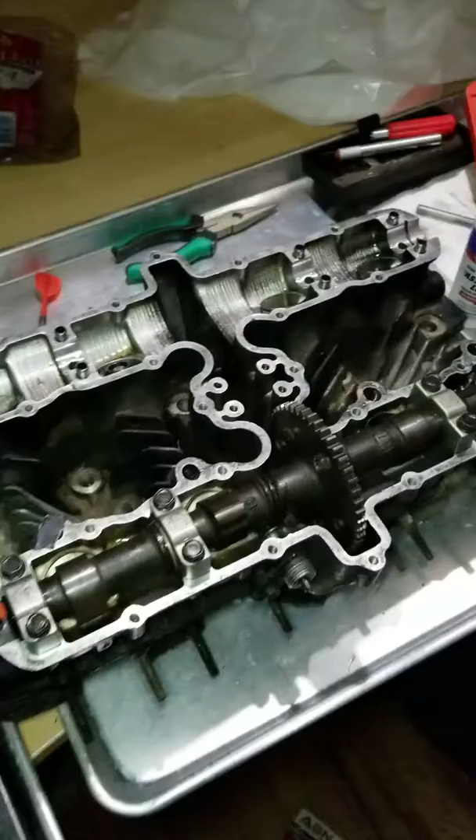Hi guys, I have been working on this head from my 1981 Kawasaki KZ750E2. It was not running really well at all, and then it stopped running altogether, and then it started backfiring every time I tried to start it up.

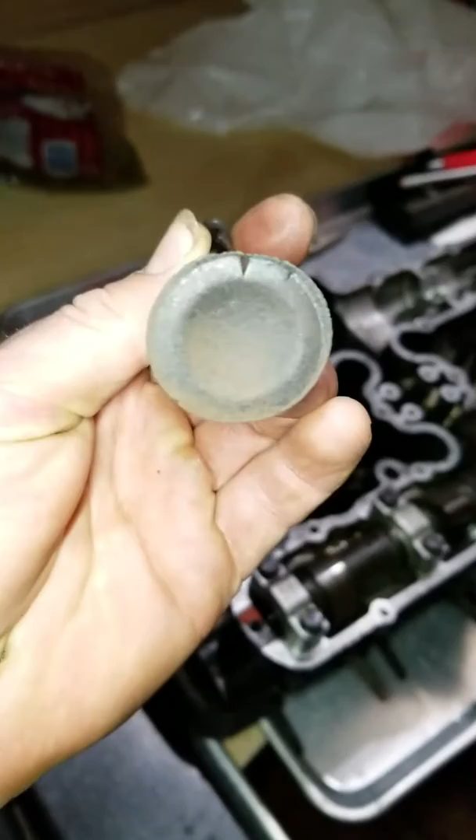So then eventually I got around to checking compression, and one of the pistons did not have any compression at all, and that's due to this valve, which you can see is really messed up, completely burnt out. That's what a burnt valve looks like.

You can also tell by the top, you can see there's a little lip there. Actually there's a big lip on this one. That's the center left valve, and this is the center right valve, which I'm also replacing. A little bit of a lip on it as well, so I decided to replace that.

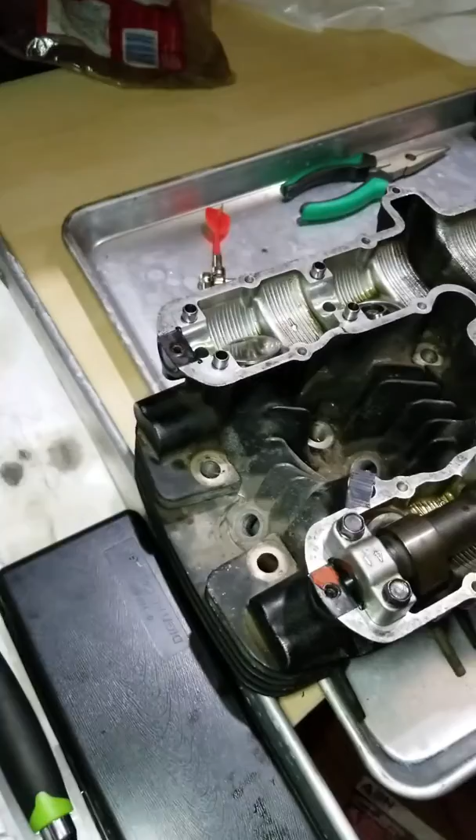Just wanted to show you guys what it looks like in here. So here we have the exhaust valve cam. You can tell that because it has the gear for the tachometer here, which actually leaks like a sieve, so I need to get a new valve or a new gasket for that as well.

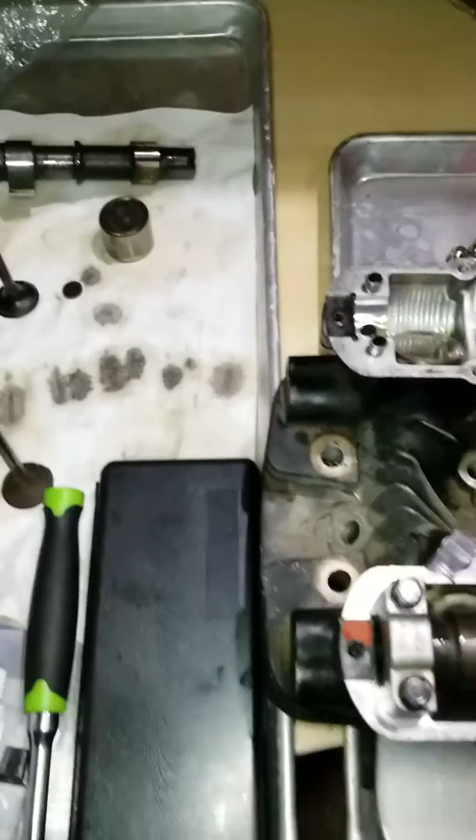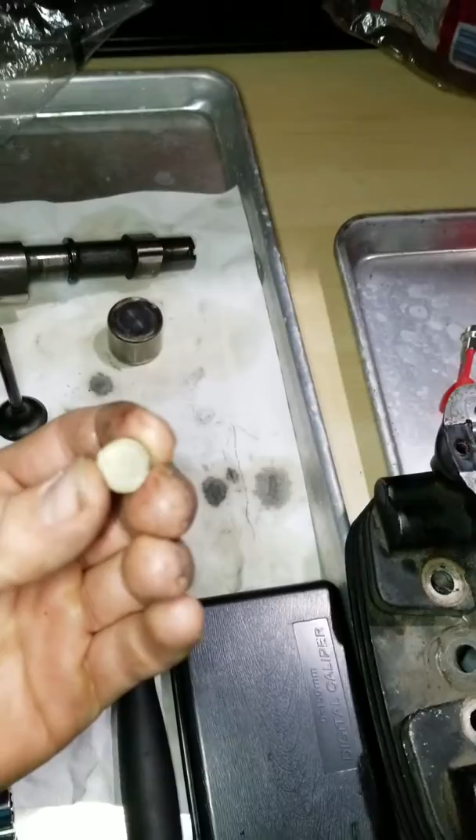Root problem for that burnt up valve is the shim spacing hadn't been done in far too long. Didn't even know it existed, but tore it apart anyways. Found these and realized that there's probably no gap, and so the valve was staying open, even though the lobes were all the way up, and so exhaust was leaking past and heating up the edges of those valves and started burning them up.

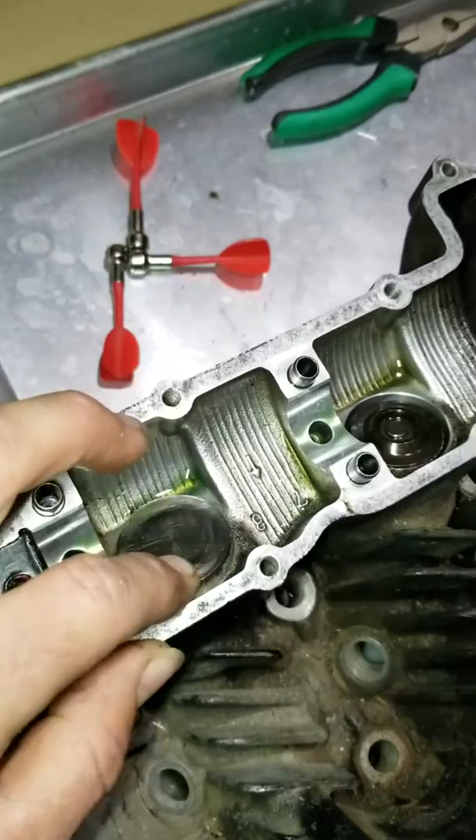It's kind of in a nice stage right here to show you guys what the internals look like. So there's the cam for the exhaust, and over here you can see the tappet buckets. These should move freely within there, and you should be able to get them in and out easily, but those two front ones were tight, so I'm going to replace those as well.

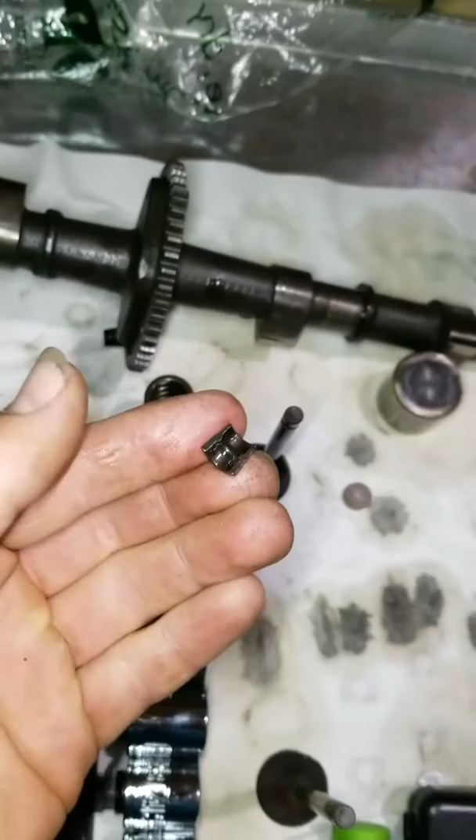And then you can see underneath there, this is the spring retainer, and inside the spring retainer you have these little conical holders that slip down in there and kind of wedge themselves in there.

You need a valve removal tool to get those out. I got the first one out with a socket and a hammer, which is not the right way to do it. To get them back together, you have to have that tool, or a very large C clamp would probably work, but it was worth the $22 off Amazon or whatever I spent on it.

So yeah, I'm putting in two new valves here. I put in new valve seals, you can kind of see that little blue thing in there. The old ones were just basically crumbling. Trying to get them out with a pair of pliers just tore them apart. I expected to replace them anyways, so I wasn't very delicate, but yeah.

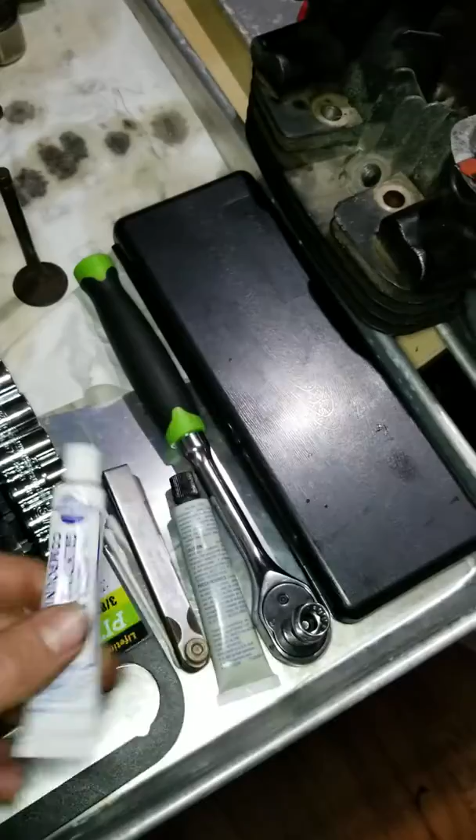So something else I did is I got some grinding metal compound. This stuff's great, you can just put it around the edge of the valve, put your valve in, hook up an electric drill, and it'll reseat your valves nicely, so you know you'll have good seal. While I was doing

the valve shim replacement, I used a feeler gauge underneath all of these, making sure there's a space, which none of these exhaust valves had any space at all underneath them, at least that I could feel with a 1,000th inch feeler gauge. Only two of the intake valves had any space underneath them.

So I assumed zero for the other two, because the tappet buckets were still moving, I could still rotate them. But for the front ones, I assumed that it was not zero because the tappet buckets weren't able to be moved with my finger, and also because I burned up that valve. So I actually moved the shims from the intake side, which were far smaller than the exhaust side, to the exhaust side, so I would have a significant gap to be able to be measured, and then did the math to see what clearance I needed, which can range from 0.08 millimeters to 0.18 millimeters valve gap.

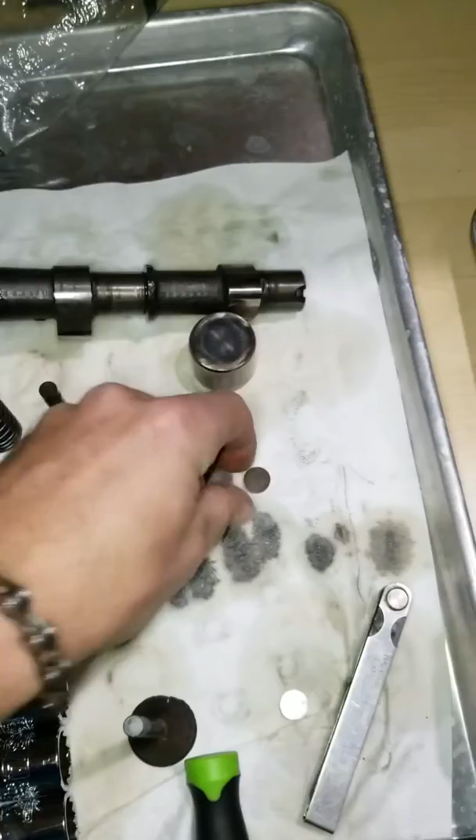These little valve shims actually fit underneath these tappet buckets. You kind of see a little spot for them, they stick to them, and they sit in here like that. So it's good to put them in like that, that way they're lined up when you're putting the tappet buckets in.

I actually had to put one of the tappet buckets in, and on that exhaust valve, that center left one that burned up, it was so messed up that I had to put it in the freezer to get it in. That's kind of the point I decided that needed to be replaced.

The other thing to note, you can see on the top of these, they're numbered 1, 2, 3, etc., and they have an arrow facing forward. This is actually the front of the bike, because this is the exhaust side. So that's really helpful, that way you know those go in the same place. And then here you also have 5, 6, 7, 8.

So that's nice. One thing also, you can use this gear here, which you can see this one has a big old chunk missing out of it. But you can use this to make sure that this cam is the right direction. You also notice this gear is bolted on from one side, so you can assume this is the proper installation because of this worm drive here. You can actually use that to make sure this one goes in right, so it'd be oriented to line up with that one.

So that's cool. I've got this lined up for the, if I turn the head around.

Another thing to note, the valve springs, this is the inner one. There's also the outer one. But on both of them, you'll notice that on the bottom you have tighter coils here than the top. So that's going to be the top where the looser coils are. That's something important to note while you're putting these back together.

And always lay out all your stuff, or else you'll get it really confused. It's hard to tell valves apart unless they're burnt up like mine are. But yeah, this is the 1981 Kawasaki KZ750.

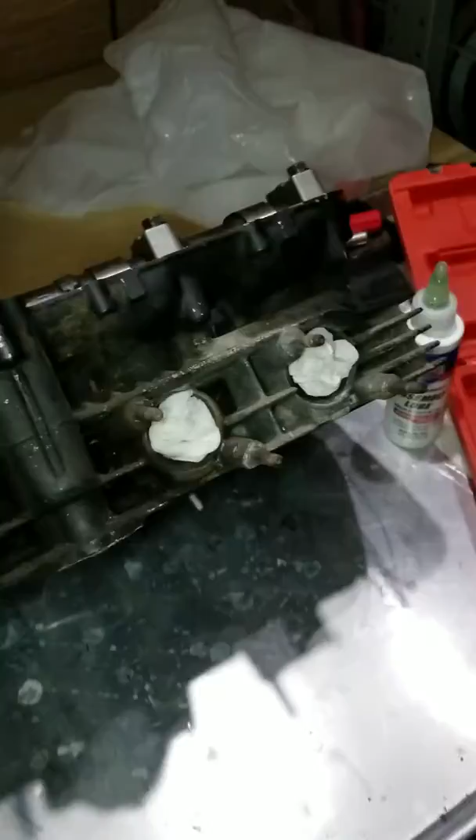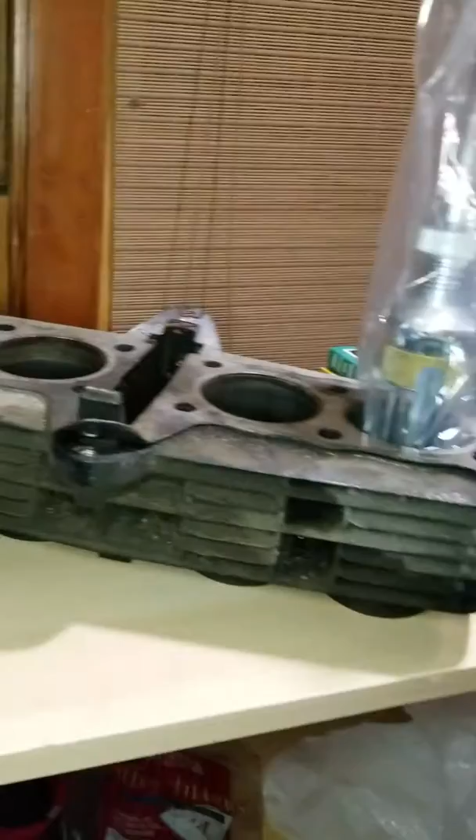Bike's been ridden pretty hard, had a lot of fun with it. But hopefully I'll get it back together. I'm also putting in a new head gasket, honing the cylinder.

This is the cylinder head. This is the chain tensioner here. But I actually got some gravel in the crankcase, so I'm gonna have to try and flush that out somehow. That's kind of the next step once I get all my parts in and installed.

Also getting the gasket that goes underneath here scraped off the crankcase. It's really stuck on there, so that's gonna be a little bit of a project. But other than that, I've got all my shim spacing proper.

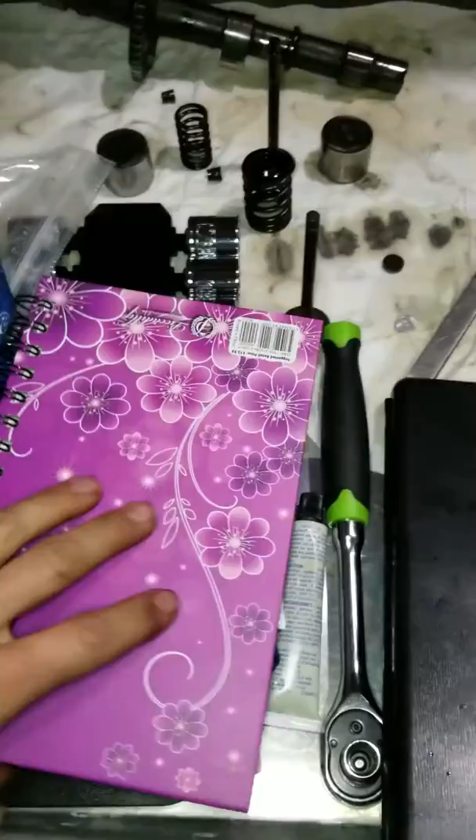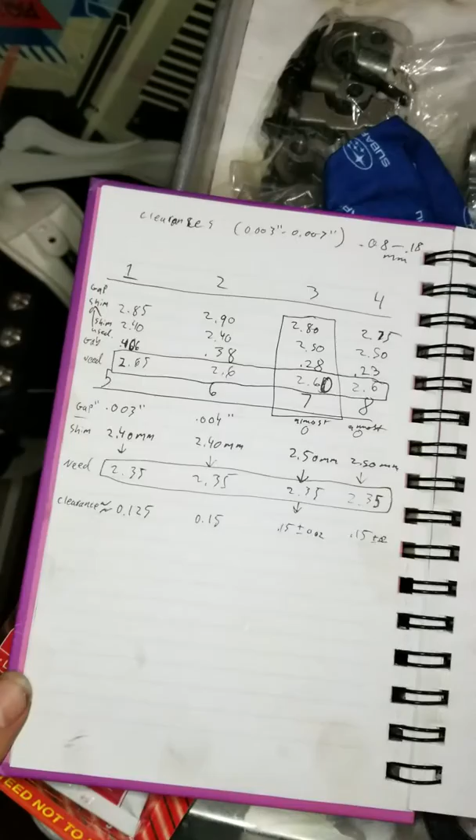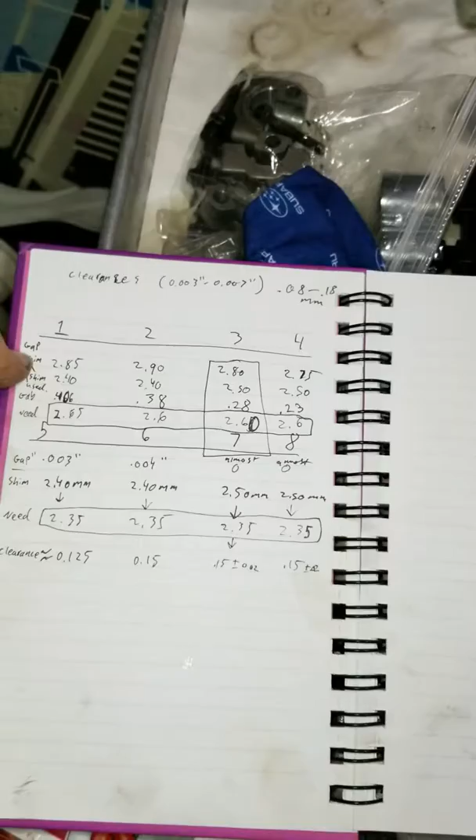I've actually got, excuse my notebook, but I've got the math I did to figure out what valve shims I needed. So you can pause it here if you want to take a look at it. I didn't really put the math in there, I did it on my phone, but you can kind of see how I laid it out. So here I'm measuring the original gap, which I didn't put here because I have it on the previous page, so that's kind of not that helpful.

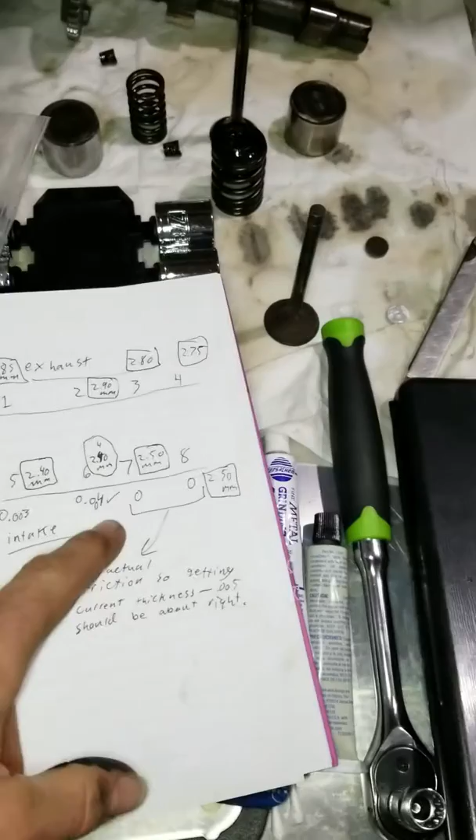It was 0.003, 0.004, and then 0 and 0. So only that one, sorry, that's in inches, thousandths of inches. So when you convert that to millimeters, that's just barely within the 0.08 millimeter range. So that was the only one that worked.

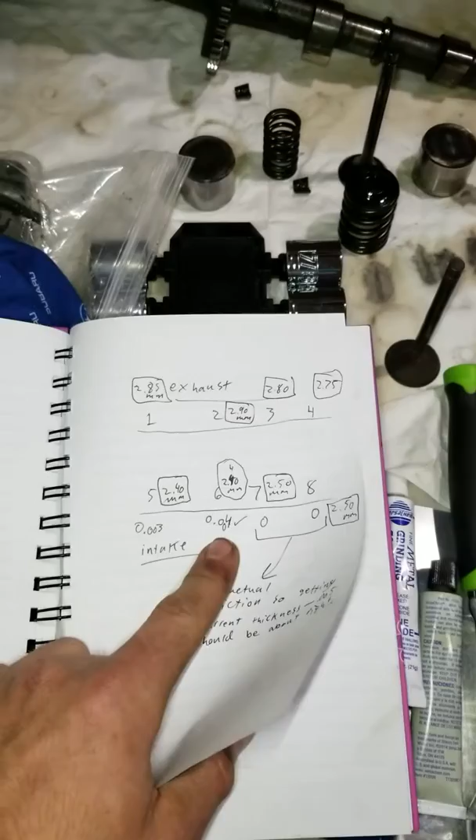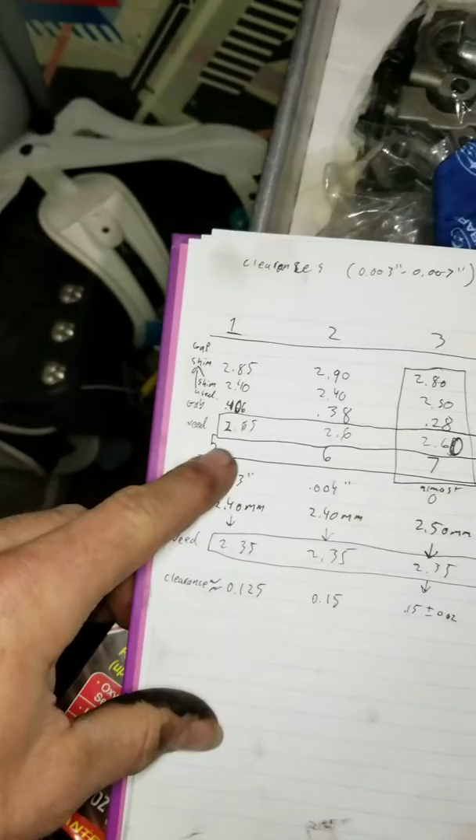So I'm getting all new shims. I'm making it so there's a pretty good gap, so I don't have to do this again very soon. But you can see I actually, so it was for the exhaust valve anyway.

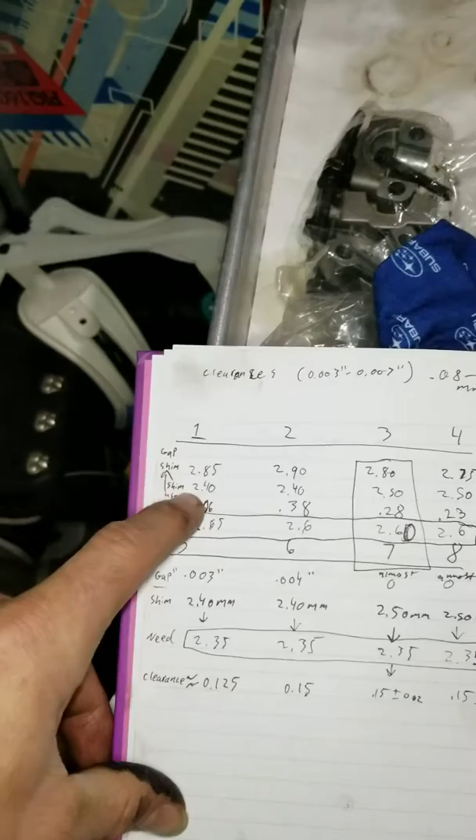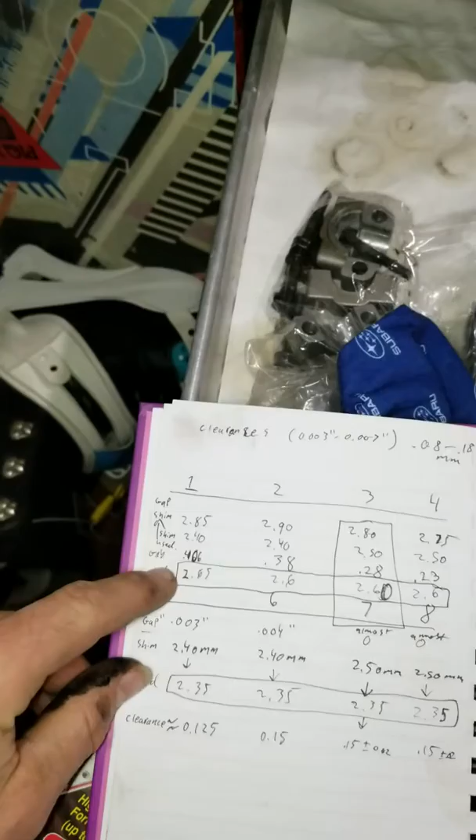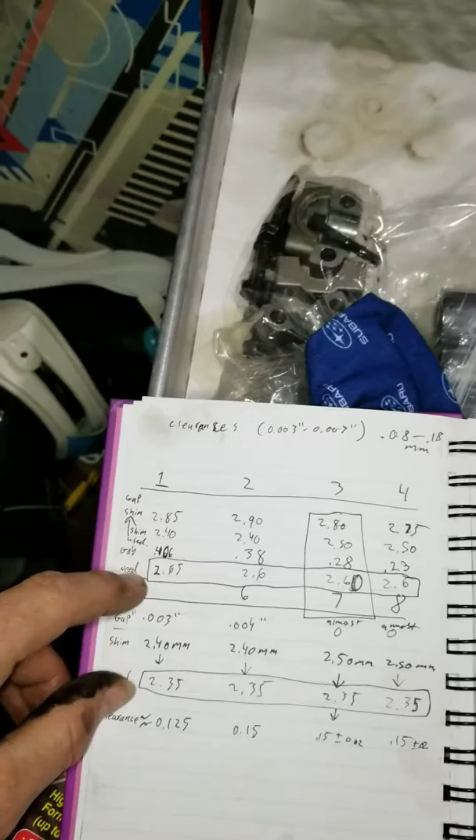So this is the shim that was in here, it was a 2.85, but then I was like, oh, that's not going to work because there's no gap. So I put in the 2.4 from the intake side, so I could get a reading of 0.406, and then did some math to figure out that I need a 2.65 on that exhaust, the exhaust left outside. Just did that for all of these.

Yeah, good stuff to know how to do. I'm going to definitely do it more often, or at least check it, because that really messed that up. I was pretty upset. Bike's been apart for over a year now, so things are pretty dirty. I'm going to have a lot of work ahead of me.

Been lazy about it, but yeah, thought I'd give you guys a little bit of information on the Kawasaki KZ750E2 from '81. It's got 4 carburetors, so I've got to deal with that too, but I think they're doing alright and need to figure that out. All right, thanks, bye.